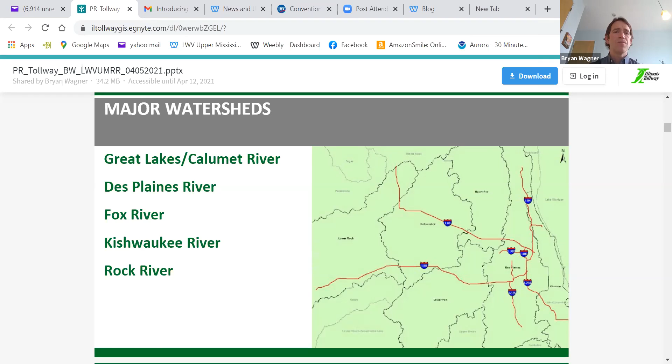So we've got 5 different major watersheds that we contribute to. I think we have around 71 different outlets to those drainage basins, and the Des Plaines River receives most of the tollway's stormwater. Go ahead and next slide.

With all roadway agencies, pollutants of concern are pretty much uniform. You're looking at metals, heavy metals, hydrocarbons, fuel spills, and suspended sediments. The one caveat, in the northern section of the country, or those who have more severe winters, is chlorides due to winter operations, de-icing, snow events, those types of things. So we'll get to all of these throughout the presentation.

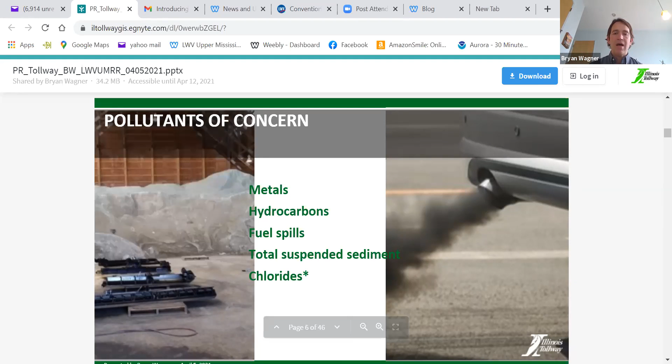But now as we roll to the next slide, I'm going to start to talk about the thought process or evolution of our stormwater program. And that started with this bioswale pilot project. Next slide. So in our previous capital program, the tollway reconstructed and widened 294 from just north of O'Hare up to the Wisconsin state line.

And as we were going through the concept development of that project, we found that our right-of-way was pretty constrained in the Cook County section of the project area, meaning we didn't have a lot of room outside of what was already our right-of-way. So when you're widening, you need more room for everything, right? You need more room for a road, but then all the ancillary things: where are you going to put all that water from the additional impervious that's going to be generated? Those types of things are what my interests are.

So about 15, 20 years ago, this just predates me, and pardon me talking fast, but I'm going to go through some of this quickly and slow down when there's more detail to talk through. So about 15, 20 years ago, we came into this subject where it's like, all right, we want to widen the road, but we don't have a lot of room for our stormwater, so we have 1 or 2 options for addressing it.

And one is traditional gray: put it in storm sewers, put it in pipes, large pipes, and then direct discharges to the streams, lakes, rivers in the area. Or we try and do something that's really uncomfortable, nobody's certain of, but has some presumably pretty strong environmental benefits. Well, we chose the uncomfortable one, and we kicked off trying to do something innovative with our stormwater, and that was a large-scale bioswale project.

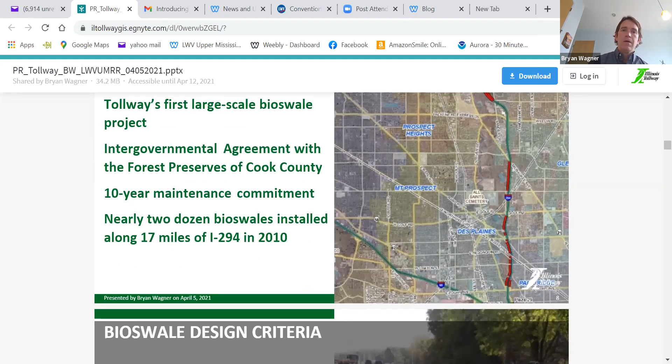So what was our criteria for pulling this together and getting buy-in? One, flood control benefits to not only the forest preserve, but the region, and then also pollutant reduction. We had to focus on good, strong green infrastructure benefits and design in order to pull something off when working with the Land Conservation Agency.

So our design was to target a 2-year storm event. For those of you who aren't familiar with roadway stormwater, those smaller, more frequent rain events are the ones that carry the majority of your roadway pollutants. Say we're getting a 4-inch rain in 24 hours. That first half inch of rain that falls on that pavement is going to wash off the vast majority of those pollutants.

And then that last 3/4 of the storm event, there's not a whole lot of pollutants associated with that stormwater, because, right, think of a dirty table. I've got kids, so I'm thinking of Kool-Aid that's been spilled on a table, and I drop some water on it, that Kool-Aid washes off, and then the rest of the water, as I dump the rest of that glass, is relatively clean. So that's kind of the thought process with BMP design.

So we've got a 2-year storm event, capture that, treat that to the greatest extent possible, try and reduce the heavy metals and suspended solids that are there through attenuation and infiltration. So slow that water down as much as possible, and then try and infiltrate it where possible as well. Infiltration is kind of an interesting subject. You think, oh, well, let's infiltrate it. There's pluses and minuses to infiltration, and it works in some places and it doesn't work in a lot of places, at least in Chicagoland.

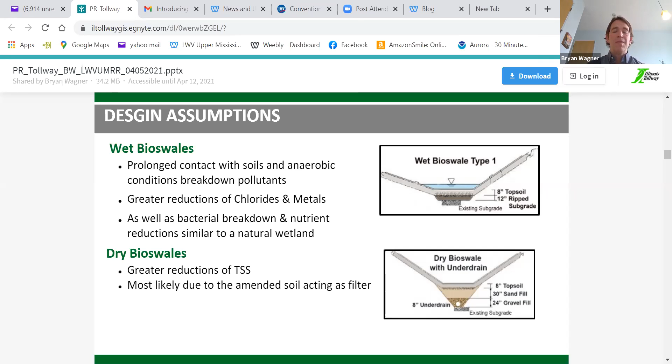So we've got 2 general bioswale designs. We've got wet and dry. Now there's fine tweaks between them where we have more like 4 or 5 bioswale designs, but in short, we have wet ones and we have dry ones. We have the wet one that you saw before where we set up ditch checks and slow that water down as much as possible. And then we have dry ones where we have an underdrain. And with an underdrain, you have to have more slope than the wet one, because if it's flat, that water is just going to sit in that underdrain and not go anywhere.

Also, what's the underlying soil condition? There's some places where you can put an underdrain in and also have good permeable soils underneath. Around here, we have a lot of tight clay soils, so the permeability rates are really low. So these are our 2 bioswale design types. Going into this, our design assumptions were we would get better total dissolved solids, TDS, out in the wet, and then the total suspended solids, just the sediment and stuff that you see in the stormwater, we'd have better results in the dry. Go ahead, next slide.

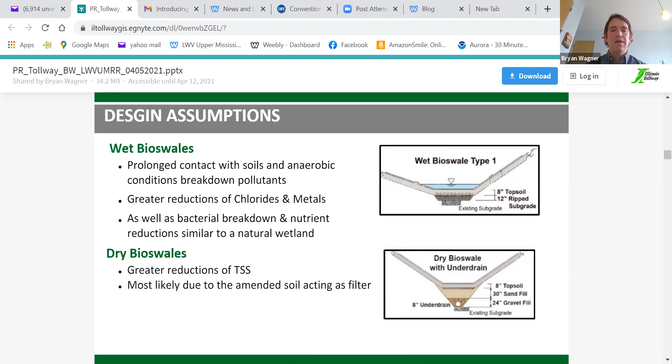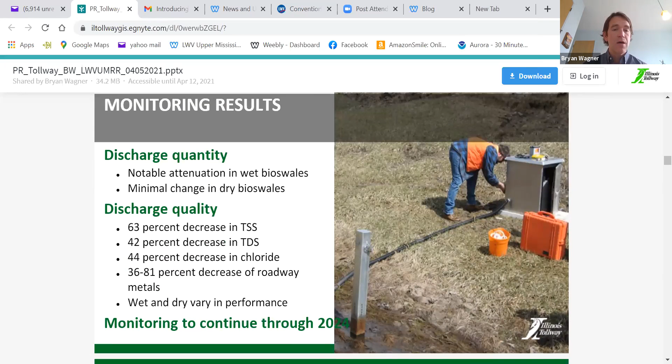So the tollway has a contract with the State Geologic Survey, and they've been out monitoring the bioswales. They actually started monitoring the North Tri-State area prior to our widening and reconstruction there, and prior to the construction of these bioswales, to get a good baseline of how these things are performing. And so they're still out there monitoring them today because we want to know what's the life of this bioswale system that we're establishing. It was, to our knowledge, the first of its kind, something this large and this magnitude of a green infrastructure stormwater system for an interstate highway.

So what's the life of this green infrastructure that we've invested in? Is it 5 years? Is it 10 years? Is it 20? We don't know, but we need to find out what it is to have appropriate understanding of it. So they're still out there monitoring, and my current contract with ISGS expires at the end of '24, so they'll be monitoring the bioswales through there, and I anticipate getting another contract with the State Geologic Survey, so we'll continue the monitoring out there for the indefinite future.

But as you can see here, on these numbers, we've had some pretty significant reductions in stormwater pollutants in the suspended solids and dissolved solids. Each bioswale and how it functions is different and unique to itself. So these are general averaged numbers and aren't specific to one bioswale or the other. When you're working in real world scenarios, you don't have tight controlled variables that you would in a laboratory setting. So we've got a lot of places where there's different types of stormwater coming in to the tollway system that affects the performance of the bioswale. So while we design the bioswale to treat the tollway stormwater, you have other inputs coming in that skew that performance.

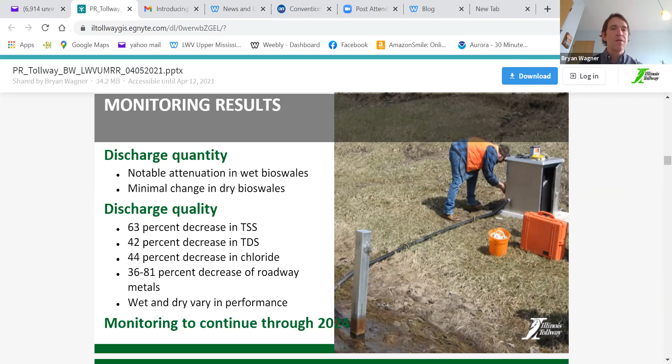So not to say that it's not performing as well as others, just all of the inputs and influences per the data show that it performs differently. Okay, anyways, next slide. So we go ahead and the next one as well. That's just kind of a title slide.

So we went through this process, and it was probably from start to finish with the Forest Preserve District, and I say finish to getting those North Tri-State bioswales constructed, it's probably a solid 7-8 years. And then shortly thereafter, we announced our new capital program, which is the Move Illinois Capital Program. So there's a lot of construction, a lot of reconstruction and widening associated with the program.

So we had to think about, all right, well, how are we going to address our stormwater? We had 1 year of data to make decisions off of for the bioswales. And, fortunately, the State Geologic Survey is really good at what they do. We were able to reach out to them and say, guys, what do you think? Are these things good enough for us to recreate and utilize as a standard for us? And they're like, yeah, they seem to be working. We don't see any reason why they won't continue to work. We don't have definitive data to put in a final report at this point in time, but they're good. So run with it. And we did.

So as Lee, if you caught the introduction, we're going to have over 67 linear miles of bioswales by the end of our program. So, we went all in with bioswales and green infrastructure. And so, stepping back here a bit, the Move Illinois program is announced. How are you going to treat your stormwater? Well, you've got two avenues to do so. You've got bioswales and detention basins. Go ahead, next slide.

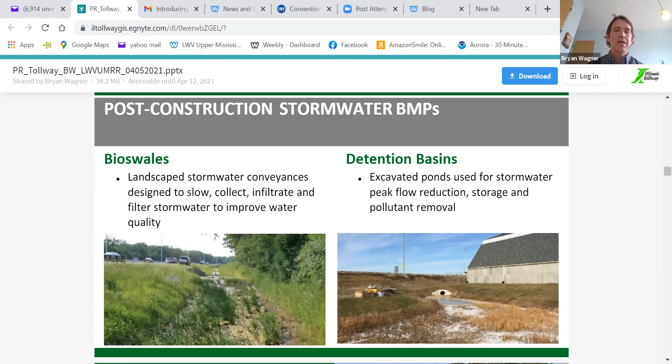So not sure how familiar you are with roadway design and construction, but for any big project, typically you have to get a Corps of Engineers permit, and that's Section 404 of the Clean Water Act. So per our Clean Water Act permitting, we permit our projects, we try and bundle them together in as big a project as we can, because you don't want to have to permit individual projects. It's too time consuming and difficult to do. The Corps wants single complete projects. That's kind of their motto.

And so, for I-90, we weren't able to permit the entire 62 miles in one, but we had 3 permits more or less for that 62-mile project. The Elgin O'Hare is 1 permit, and the Central Tri-State is 1 permit. So for those projects, we established a water quality volume. Essentially water quality volume is that first flush that I was talking about earlier, with the highest polluted or highest impacted stormwater amount. So we're looking to capture and treat that volume.

So for I-90, we had 3/4 of an inch. Elgin O'Hare, we had 1 1/4 inches. And for the Central Tri-State, we have 1 inch. The volumes vary just based on the project area, availability of space, and what's the sensitivity of the area as well. So not to say one area is more sensitive than the other, but just what we realistically have room to address. So based on the water quality volumes for the projects, that helps get us to our next phase in designing our BMP. So we go to the next slide.

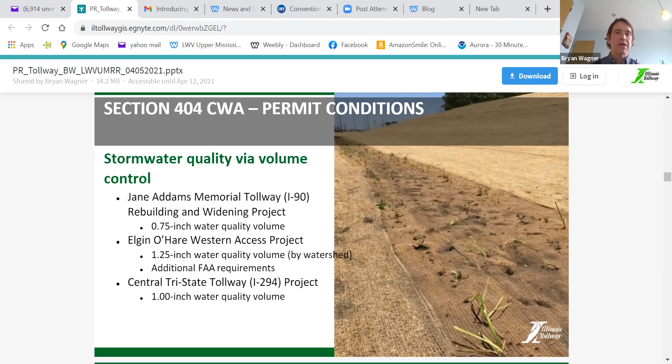So for our bioswales on I-90, because it was so shortly after our North Tri-State bioswales, they're largely a replica of the North Tri-State project. So you can see above the wet there, those ditch checks lined up. So you've got those micro pools that are set up to slow that stormwater down, hold it as long as possible before that water leaves our system.

And then the dry, as I said, you wouldn't really be able to tell what a dry bioswale looks like. But that picture is a dry bioswale, and below is the standard for our dry bioswales. So you can see there's porous granular backfill, sand backfill, with a perforated pipe underdrain.

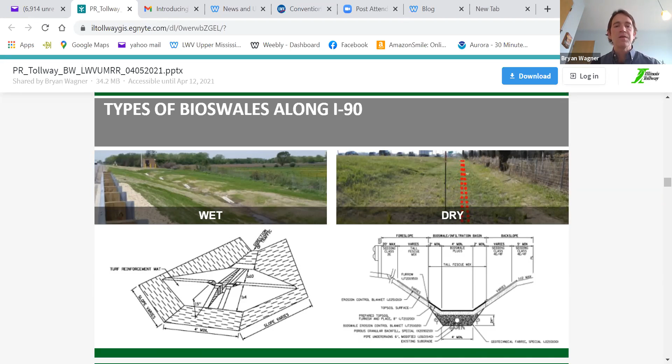And then the one change that we did make for the I-90 bioswales was instead of having the top of that ditch check covered and just having a pipe through the middle, we opened that whole area up and gave it a V shape as opposed to a pipe shape, because we were getting some erosion around the top of those ditch checks on those higher rain events. So this helped minimize that erosion. All right, next slide.

So the Elgin O'Hare 390, 490, those bioswale designs were similar. We didn't really change a whole lot here. This one, our approach is a little bit different. The reason being is we had to provide water quality volume, not just for the corridor, but sub-watersheds. After working with the regulatory agencies, they're really interested in us treating water on a sub-watershed basis and not kind of on the project as a whole.

So digging some huge basin way out, kind of on one edge of the project and saying, all right, well, all our water quality volume's over there. That's not the case here. So what you're seeing here in this exhibit is kind of that approach. It's more of a treatment train approach that we have to our bioswale, our BMP design. So it's a mix of bioswales followed up with detention basins, kind of one staggered after the other, and trying to meet these water quality volumes within sub-watersheds.

So it's been tough because the Elgin O'Hare is in a pretty urbanized area. So finding space for this is tough, but fortunately, being a new corridor, we're doing a lot of land acquisition, and we're able to make this one work. So go on to the next.

And this leads us to kind of the Central Tri-State and where we are today. Finding the green in the gray is definitely the motto of sorts for the Central Tri-State. Like I mentioned earlier, it's our most heavily utilized and urbanized section of any of our roads. So if you look at Google Maps or something like that, you'll see right adjacent to 294, there's not really any open space adjacent to us. And the only open space would be forest preserve land, public lands. So highly constrained right of way.

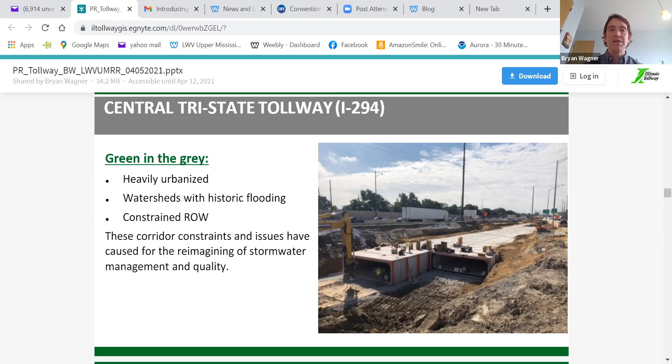So, on a decision tree, which I'll show you here just shortly, your ideal scenario is that you've got a nice, wide, meandering bioswale that's open. It's not behind a retaining wall, or you're not boxed in someplace, and nice, gentle slope, things along those lines. But that perfect world bioswale scenario is really hard to come by in the Chicagoland region just because of space constraints. We can go to the next slide.

So the one other treatment process is detention basins. I'm sure you all are familiar with detention basins in one way or another. You've got dry and wet basins. Preferred from an environmental standpoint is wet because you're capturing and typically holding on to some water in perpetuity. That water won't release, it always stays there. And so, you always have some permanent capture there. But with dry, the water fills up and drains eventually. Both work for pollutant removal. It's just the wet is a little bit more effective.

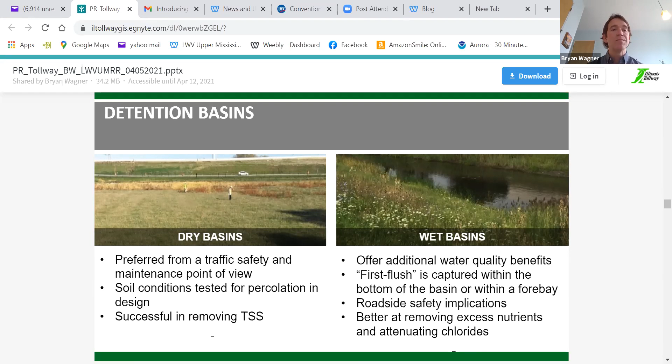And something that we're very conscious of and concerned with at the tollway is safety. A car goes off of our roadway system and ends up upside down in a dry basin. Well, it's a car upside down in a dry basin. It's unfortunate, but it's not that big a deal. It goes upside down in a wet basin and it's a whole lot of no good. So it's something that we're very cognizant of. While we want to push the environmental side, we also have to be safety conscious when we're installing those and making sure they're not in a location where a vehicle could end up upside down in them. Go to the next slide.

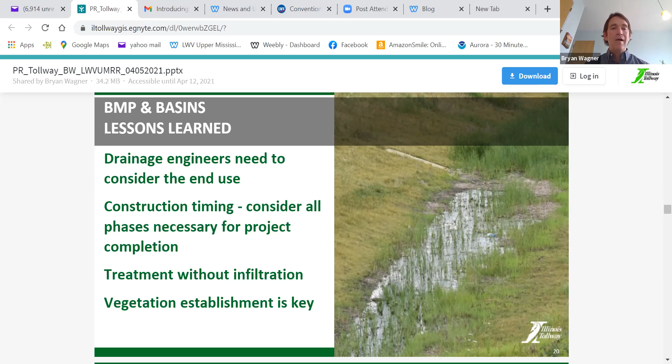Well, a year later on our projects, we're going to have a utility contract come through and place utility lines through the right of way. And as part of that, those bioswales get torn up again. So, understanding the entire scope and life of the construction of that project and making sure that the final seed and plugs of the highly desirable things that you want in your BMPs or in your ditches come last, let everybody go through, trounce around, tear it all up, and then the fix at the end isn't that big a deal. So yeah. All right, next slide.

Okay, so getting from that forest preserve concept, that first slide, to here is about 15 years of evolution in design and thought process at the tollway from a drainage design standpoint. And one really cool thing that we've come up with in the last years, we've published this in our drainage manual. It's a BMP flow chart. And so it provides our drainage designers guidance.

So the tollway will let a contract for a consulting firm to do detailed design work as part of one of our roadway projects. So this manual and this flow chart make sure that all the designers who win a tollway project are going through this BMP process appropriately. So if we go to the next slide,

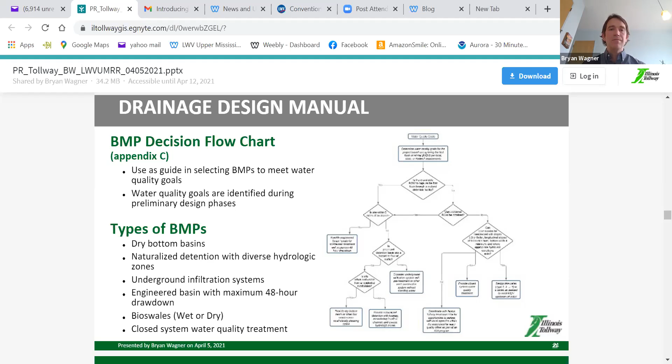Gretchen, oh, you're there. You're there, but you're not.

So this BMP flow chart is just, what's your water quality goal? What's your volume? It runs you through all the decision-making processes or questions that will present themselves on a contract that a design firm would have to address. So one big thing is, is the project within 5 miles of an airport? Why would we care if we're within 5 miles of an airport?

Well, FAA and U.S. Fish and Wildlife, along with the Corps of Engineers, have a memorandum of understanding that you're not supposed to create any wildlife-friendly or avian-friendly habitat within 5 miles of an airport because birds and airplane engines don't mix well. So we don't want to create something where there's going to be a lot of birds around in those areas. So that's a big trigger for us: are we within an airport area?

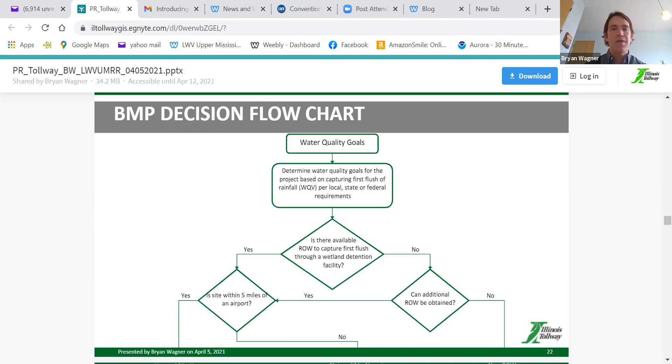Yes or no? And surprisingly enough, there's a 5 mile threshold and a 3 mile threshold. Within the Chicagoland area, if you put 5 and 3 mile bubbles over all the airports, it covers a whole lot of ground. For one of our mitigation projects, we're like, wait a minute, we can't do any mitigation except way out here on these total fringe areas of the region because there's airports all around. It was really surprising. And I'll share a little bit more on that one in a bit. But if we just go ahead and scroll to the next one, Gretchen.

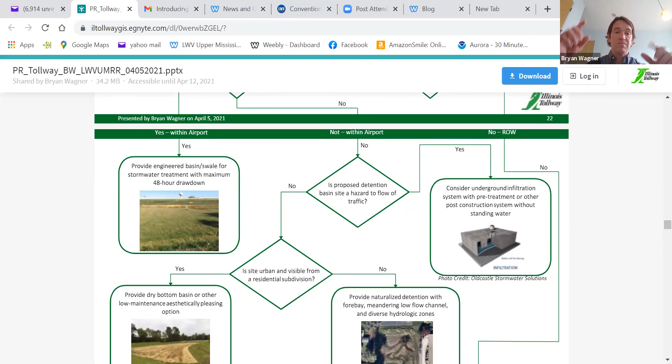So this is just highlighting what are the requirements, what are the questions. And unfortunately, I thought it was pretty cool. There's some animation associated with these slides, but we don't get to have the fun today.

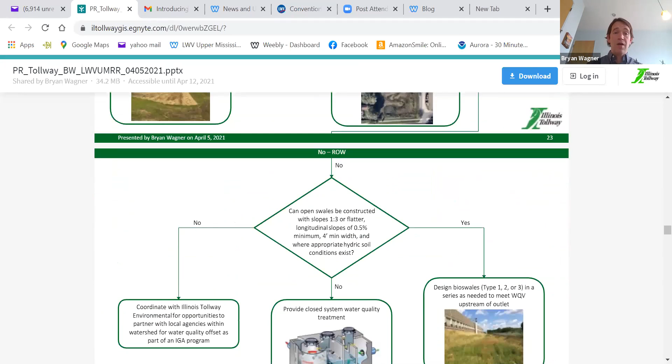It's all good. So another thing with airports is, it needs to draw down within a certain amount of time, because if you have a bunch of standing water, then you're going to have waterfowl that are more prone to go to those areas. So yeah, you have those.

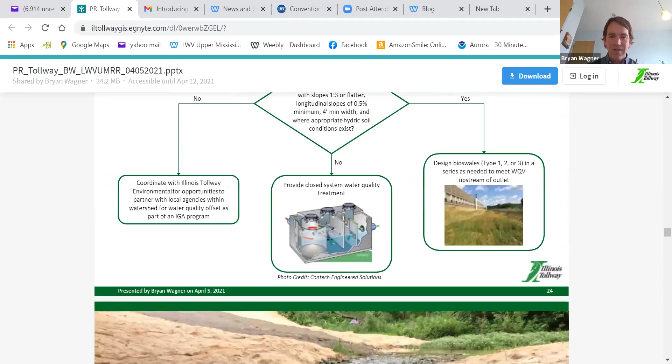And then let's scroll down just a little bit and look at that center picture there. So yeah, that's the hydrodynamic separator type thing. That's our worst case scenario. If we can't do all of these other things for stormwater treatment, then we go to this mechanical method. All right, here we go. Next slide. So, chloride offset program. Next slide.

Let's see. Water quality regulations. So not only is there section 404 of the Clean Water Act, but there's section 401, and 401 is water quality. And then there's also general use standards that are outside of project permitting. The general use standard for chlorides is 500 milligrams per liter.

So if a stream hits at any point in time 500 milligrams per liter of salt, and there's a sample taken of it, we'll save all the details. If a stream exceeds 500 milligrams per liter at any point in time for chlorides, it becomes impaired. And that's a technical term that the IEPA has, and same with US EPA. There's impaired streams for all different types of pollutants and constituents, but here we're specifically focusing on chloride. So if it hits 500 milligrams, it's impaired, and then it gets put on a list for developing a TMDL. A TMDL is a total maximum daily load.

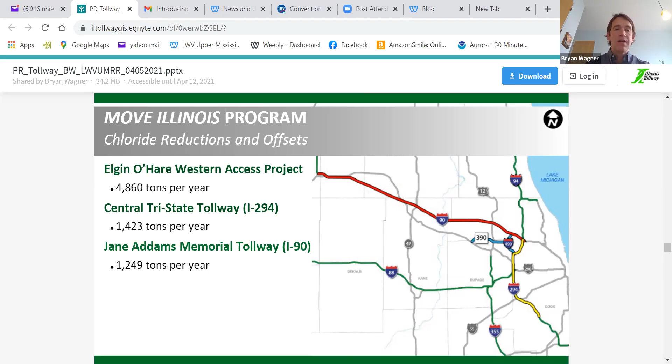So the Elgin O'Hare was the one that really brought this to our attention. It's a new facility. And so if you remember on that previous slide, the Elgin O'Hare had the most salt that we had to reduce or offset because it's a brand new facility. It's not an existing road. We either had to try and reduce approximately 4,800 tons of salt from the system ourselves, or come up with some way to offset that or reduce it from the larger region. And what we did is we established an offset program, similar to carbon credits or something along those lines.

Essentially, we said, hey, adjoining municipalities, or what we call tier 1 municipalities, those that directly abut 390 or 490 or anything on the Elgin O'Hare system, if you would be willing to come up with a plan demonstrating how you're going to reduce salt within your municipality, the tollway will help fund that or possibly fund it in its entirety. So kind of a grant program for establishing or upgrading their winter operations. So if we go to the next slide. As part of that effort, we worked with a really strong watershed planning group, the DRSCW, DuPage River Salt Creek Work Group. They're a great work group.

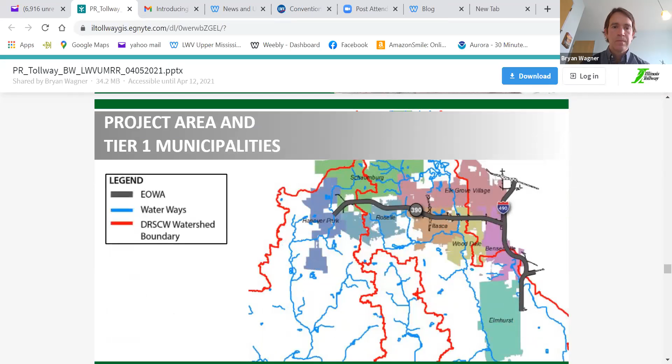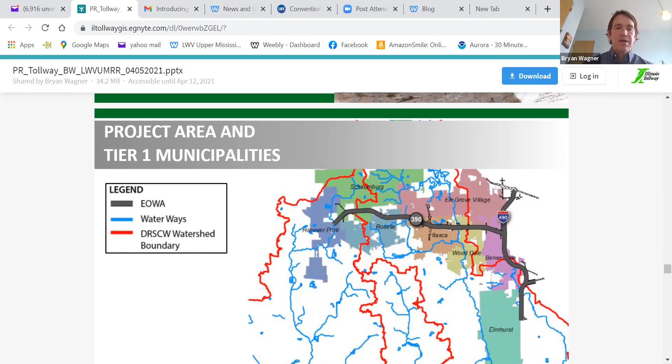So again, tier 1 communities, those are the municipalities that are directly adjacent to the roadway or that the roadway bisects. And this is just a quick image of that. We can go on. I'm running short, so go ahead and next slide.

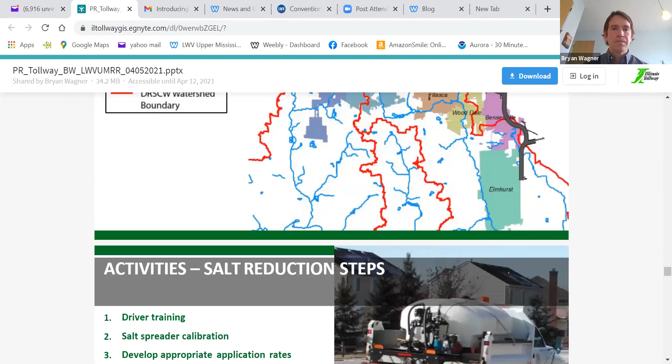So what are the steps? Anybody who's familiar with winter operations practices and, let's call it, cutting edge, what's new: moving away from rock salt and becoming more reliant on liquids is the thing that's going to get us there. There's a lot of unease on the maintenance side of things, with the guys who have been driving the plows for decades, about switching over to all liquids.

And you can't do it overnight, because in one of our meetings, I've gotten two good quotes that will live with me for pretty much as long as I'm in my position. And one was, Bryan, if there's an accident on a local road, they're banging out a bumper. If there's an accident on our road, you're digging a new hole someplace. Okay, that was early on in the salt conversation. And so that guy, he's retired from the tollway now, wasn't too interested in having salt efficiency conversations with me. So it's like, okay, understood.

I'm going to find other ways to work this idea or this concept than through you. And the other one is, I'm running a fine line between being very green and progressive and having a dangerous road environment. And that's so true because conditions in winter storms change within a moment's notice, they change pretty quick, right? So you might have nice fluffy snow coming down, no big deal. Well, then it cools off or warms up, and then you've got a freezing ice or freezing rain condition.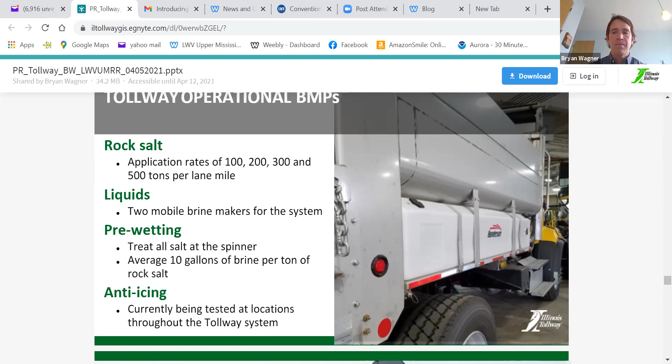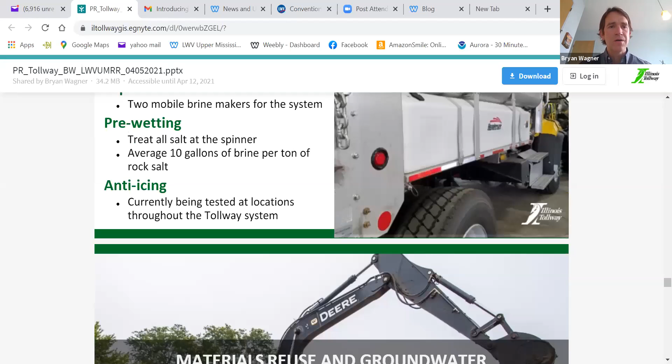And I recognize I'm 7 minutes over by my clock, so I'm going to talk fast. So the next slide is dirt. You can go ahead one more down. Yep. Materials, soil reuse guidelines.

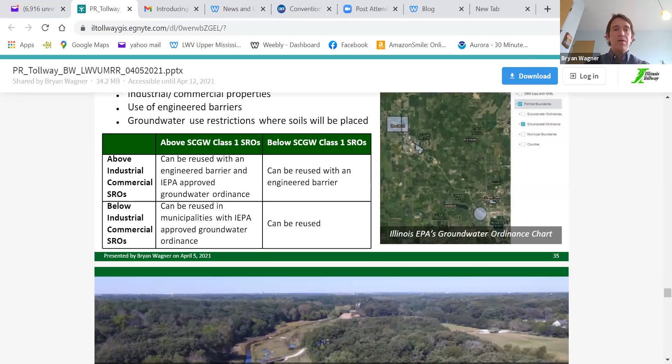So another thing that we're focused on from a water perspective is our dirt, believe it or not. So you take a scoop of dirt out, can it be reused? Can it not be reused? Does it need to go to a landfill? Does it need to go to a CCDD facility? Well, there's constituents regardless of if it's from a nature preserve or from the west side of O'Hare. I say the west side of O'Hare because it's kind of dirty. There's constituents in that dirt of varying degrees.

And so sometimes it's safe to reuse that dirt. I think probably the majority of you are pulling from groundwater or have groundwater wells, or your municipality has a groundwater well, and aren't necessarily pulling from the lake like I am here in the city. So, is it safe to reuse our dirt? Stormwater filters through our soil, that water picks up the constituents in that dirt and makes it down to somebody's groundwater well. Are we going to be negatively impacting that well or not?

So that's a level of effort that we're giving from a stormwater perspective. And from our material reuse perspective, we want to be cognizant of that. And the last thing we want to do is be a cause for any groundwater impacts that would impact any of your wells. All right, next slide.

Okay, so these are the fun projects, the wetland mitigation projects. So for our big construction projects, the Elgin O'Hare, the Central Tri-State, and I-90, one unique thing that we do at the tollway is we typically do what's called permittee responsible mitigation. There's a number of different avenues you can take for mitigating wetland impacts. And the Corps' preference, and I totally understand it, is for you to buy mitigation credits at a mitigation bank.

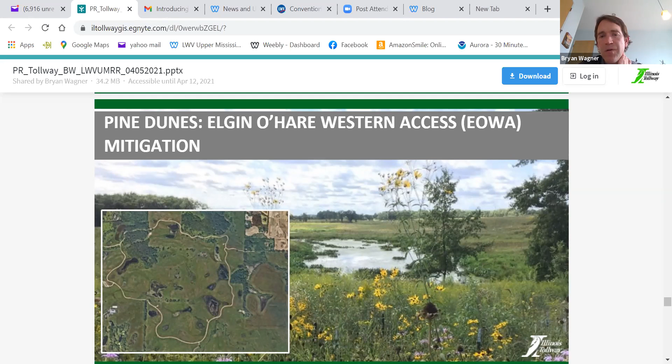This is for the I-90 project, and this is immediately south of the Orland Grasslands. So this is Forest Preserve District of Cook County. Partnered with them, same concept. It was old ag that they just recently purchased. They didn't have money programmed for the restoration of it. So we worked with them to say, hey, give us access to the land. We'll work with you on the design of it and make sure you're on board with it and it meets your vision.

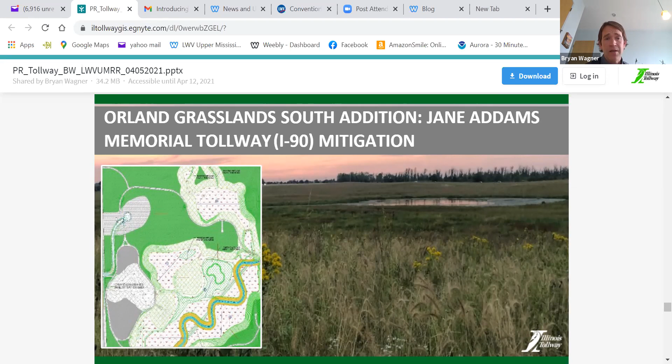And we'll also put in a driveway, parking lot, trail system, bridges, boardwalks, overlook areas. So again, building a forest preserve. So Orland Grasslands and Pine Dunes are sites that the Tollway led the construction on. And now we'll go to the next slide.

Springbrook Creek is in DuPage County, and this is a project with the Forest Preserve District of DuPage County. And this one's interesting because when it's all said and done, we'll have restored almost 2 miles of stream of Springbrook Creek. Just upstream of this, we have some Elgin O'Hare Western Access mitigation. And this site here is in Blackwell Forest Preserve. And there's an old dam there in the forest preserve that dammed up Springbrook.

We left the dam in place. And this one, the Tollway is funding the work, but the Forest Preserve is actually conducting this work. So we didn't remove the dam. The dam was left in place as flood control. It's kind of a big culvert, but we cut a new channel just to the west of where the existing channel is, and meandered that new channel down to a new confluence to meet with the existing channel, and so that dropped.

That dropped the pool, and what was the old pool area will now be all wetland areas. There's a portion of a regional trail that's getting constructed as part of this project, and this one's pretty cool. It's pretty rare in an urban area that a transportation agency gets to take credit for restoring over 2 linear miles of stream. And so pretty excited about this one.

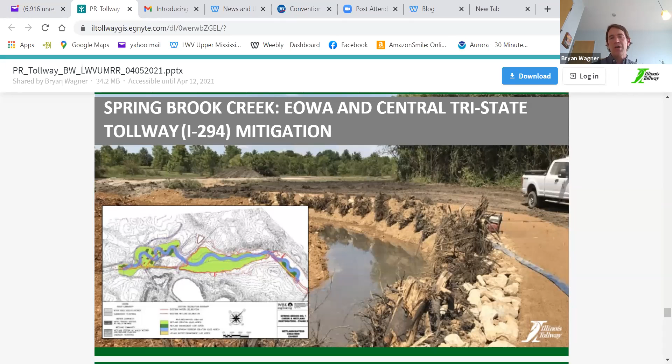So a couple other initiatives that we've got: a landscape master plan, and I'll just touch briefly on these. We're planting 58,000 trees throughout the tollway network. We partnered with the Morton Arboretum on this one. They helped give us some guidance on it, and this is kind of where we got that biosolid award from. We're utilizing the MWRD's biosolids as a soil supplement on this project. So 58,000 trees throughout the tollway system.

The main thing that we found here, takeaway for most of you: a lot of times you like to use bigger trees, bigger shrubs, want something to show for it, and you don't want to hit it with your mower. I get it. But at least in our roadway environment, we found that using younger planting stock is a bit better for us than using something that's kind of 5 to 10 years old, something that might be 6 to 10 feet in height, or 3 to 5 inches in diameter,

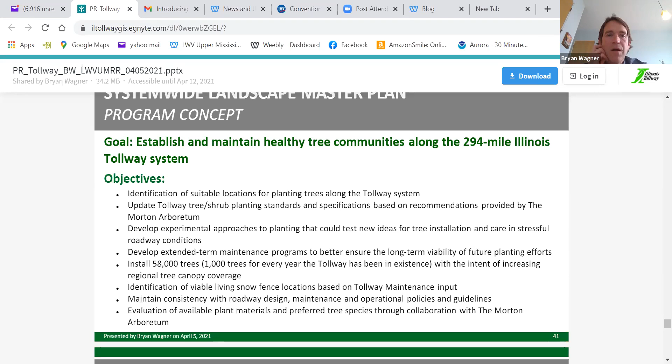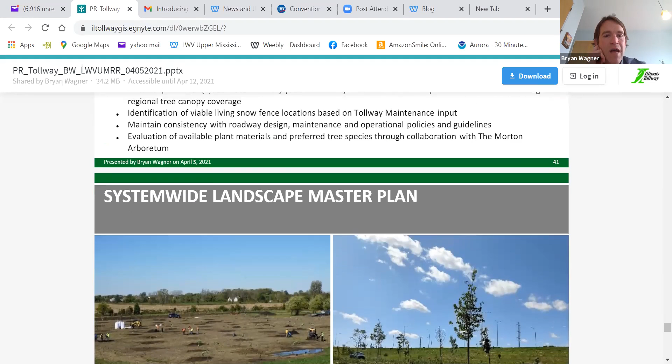because the younger the tree, the more adaptable it is to those environments. So you get something that's a little bit older, and it's going to struggle a bit more with the new environment, especially a harsh roadway environment. 58,000 trees, and I think when it's all said and done, about 6 years. Here's some pictures of it. We've got various planting approaches, so we've got some dense plantings and scattered plantings.

And our last initiative that we're a part of is a pollinator initiative. The monarch butterfly is a candidate species for being federally listed. Prior to it becoming a candidate species, probably about 5 years ago at this point, understanding the difficulties that pollinators were having throughout the region and the country, one of the things that we focused on was trying to incorporate pollinator-friendly habitat wherever possible. So those mitigation sites, there's a lot of pollinator habitat that's being established there.

And then our BMPs, we found that swamp milkweed does quite well in our right of way and in those BMP areas. And then also on our back slopes, we don't really want to put that on fore slopes. So you've got the road, you've got the slope coming down to the ditch, and then you've got the ditch here. So from the ditch up to the road, pretty harsh environment. There's not a lot of stuff that really likes it there, and understandably, I don't like being in our ditches too much. It's loud, scary,

dirty. But the back slopes, from the ditch back to that right-of-way fence, we found there's quite a bit of usable space back there. And so in those areas is where we're trying to incorporate as much of our pollinator seed mixes as possible. Detention basins, the back sides of the detention basins and things along those lines is where we're trying to incorporate those.